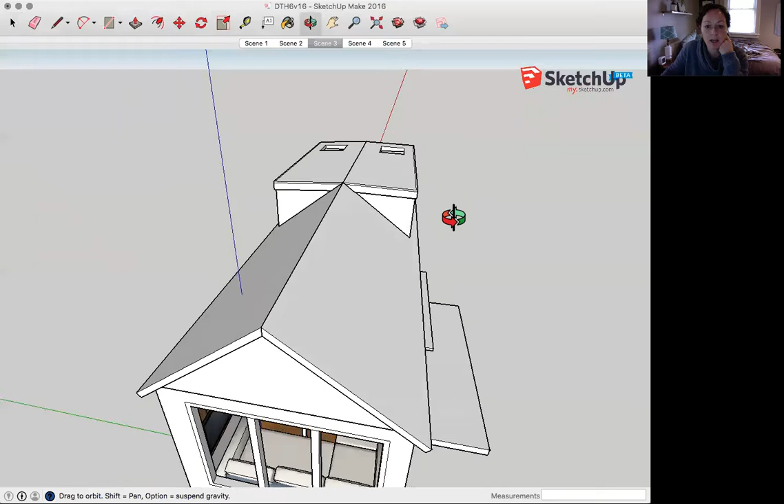Okay, so this is what you've seen a lot in tiny homes. This is a gable roof with a dormer on each side. A dormer is basically a slightly less inclined roof that pops out - the framing for the roof continues all the way around it, and then a triangle comes out. That's a traditional dormer. From the inside it'll look a little different than this finish, because there won't be this angle here. But I just wanted to quickly go over this with you.

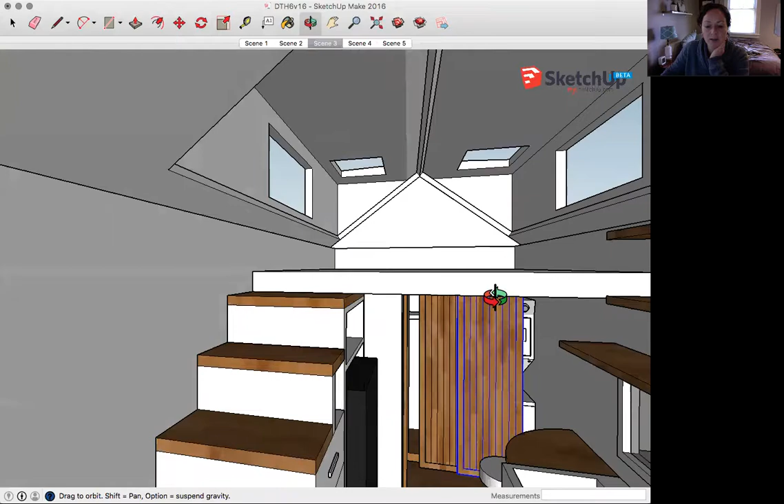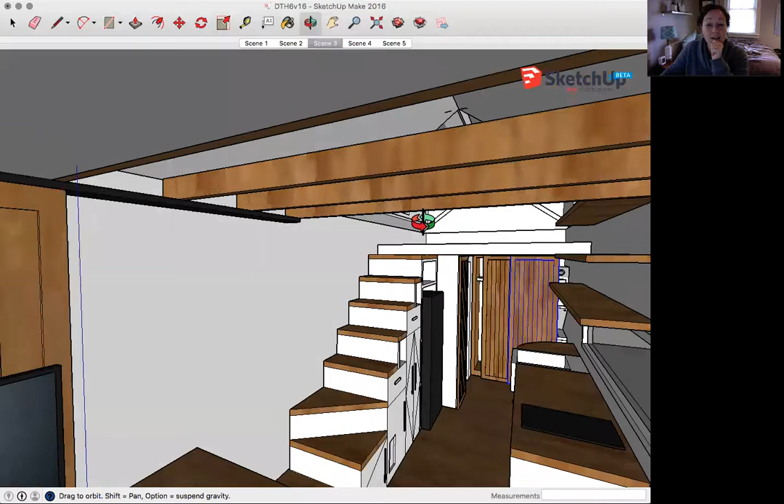So this is pretty much how you get your rectangular space up here with two dormers, but that really limits the amount of space you have in the living area. I know you wanted bike storage, and there wouldn't be enough room unless you put your bike above these beams - I think it would actually fit there. I wanted to show you how much these beams are going to cut off the space, to make sure you're okay with that, because it's really going to divide the top and bottom areas a lot. So this is with the dormer.

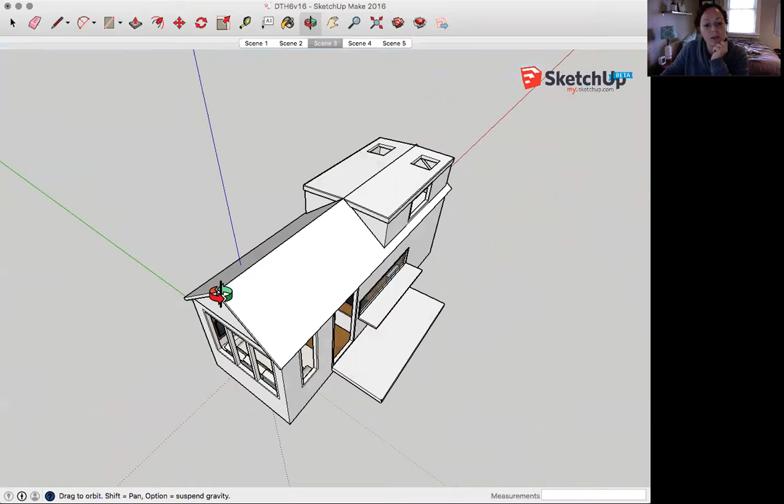The other option we were looking at before is a single shed roof, and that's this. With a single shed roof there's a ridge line - I didn't explain the ridge line either. On the ridge line, there's a single ridge beam coming from the front of the house to the back. That's a single beam that is a continuous load path essentially for the roof, and it falls on each one of the rafters.

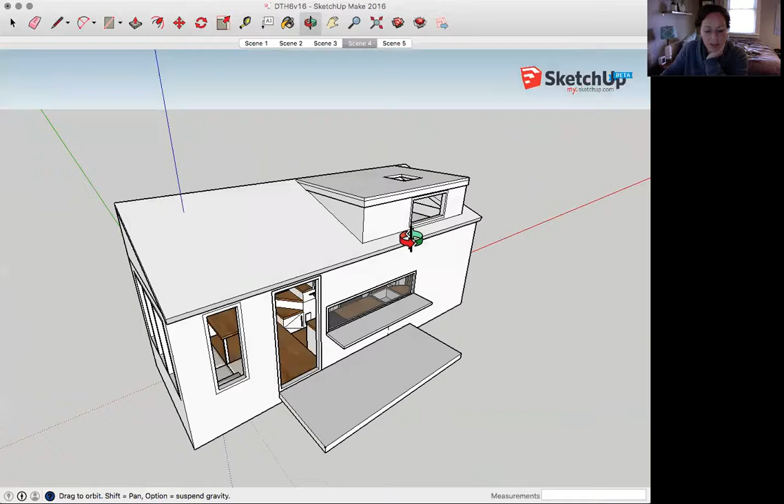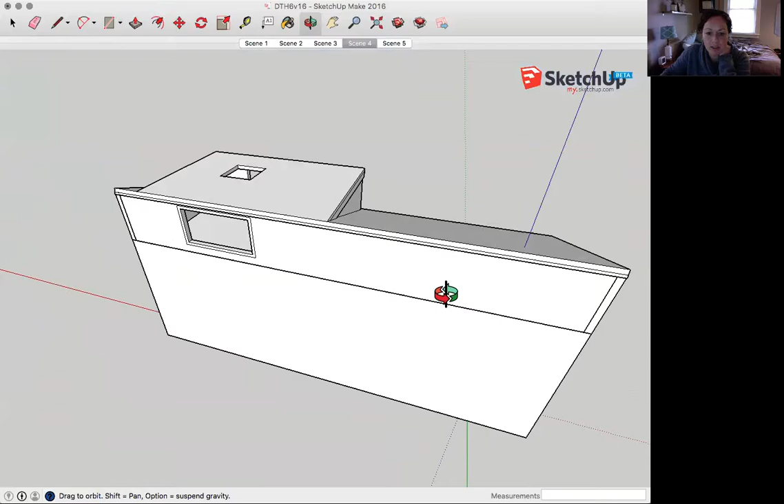On a shed roof, the ridge beam is clearly and obviously at the top, and you can pull a single dormer out to the side. That only gives you one skylight, but you could probably get two small ones in there, or one larger one. This one's only 2 foot by 2 foot that I'm showing, and a 2 foot by 4 foot window, but you can probably increase the size of that. On this side, you could put windows all across the top area and get a lot of light on the inside.

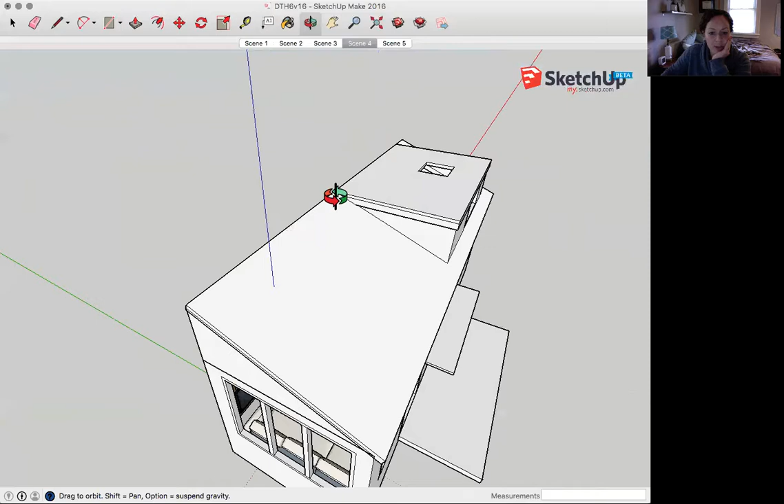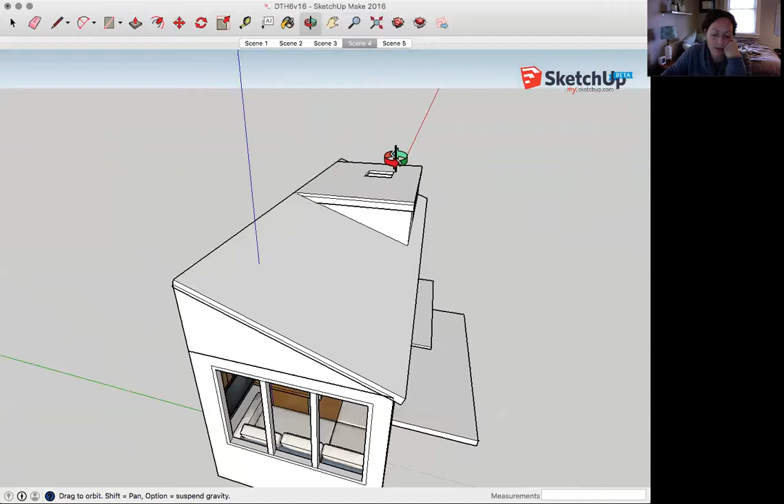The reason you couldn't have two dormers off of a shed roof is that you have this ridge beam. If you put another dormer, you'd have to have the peak at the center, and then it actually wouldn't be a dormer at all - it would just be a gable roof at this side. Typically you can't do that, because if you put a gable in the center, you'll have this weird area where the two roofs cross. Let's see if I can show you - you'd have like a triangle where they meet. You can't do that because of the way flashing works. Well, you probably can, but it's not advisable, and you'd have a gap on the back side. So I didn't even model it because it's just not something you can do. I hope that makes sense.

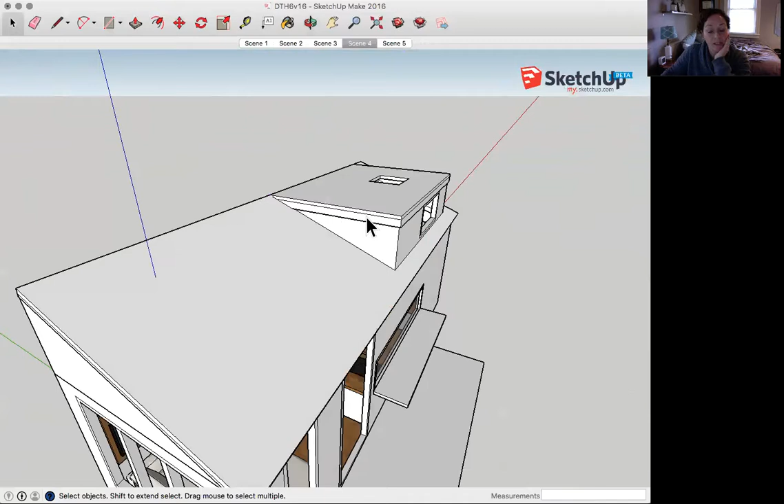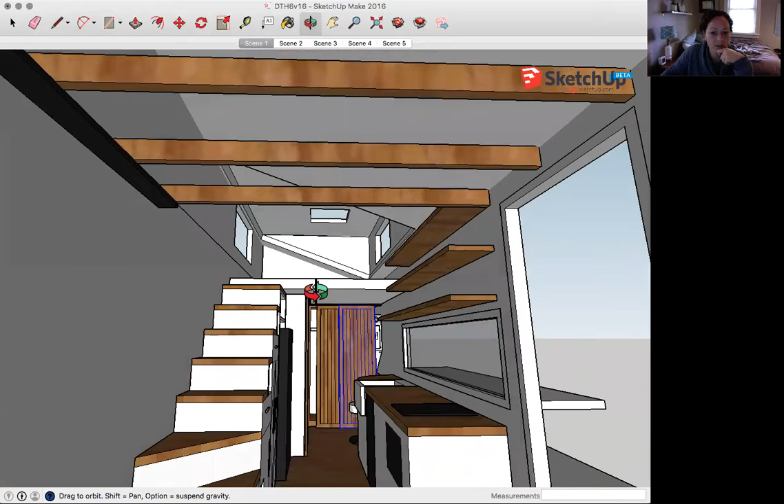Let me know if it doesn't work, and I can talk about it. There's more roof options than just these. The thing about this one, when you're on the inside, is it gives you a lot more space. You still get the same shape area, actually. We can pull this back to the wall even, and you get the same space.

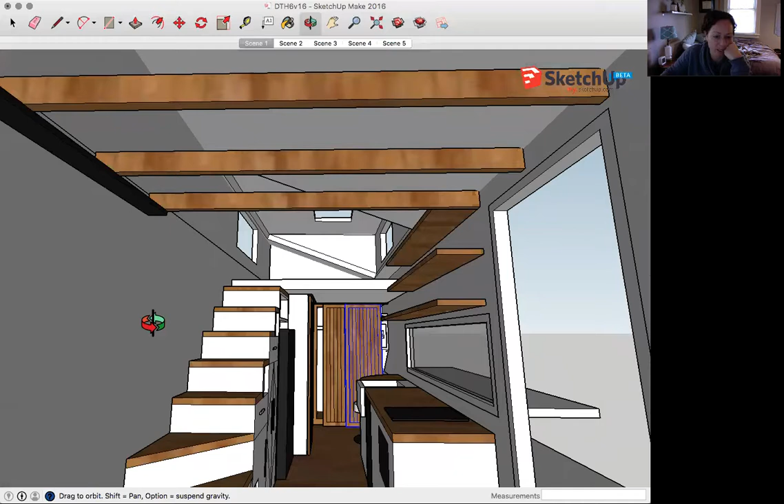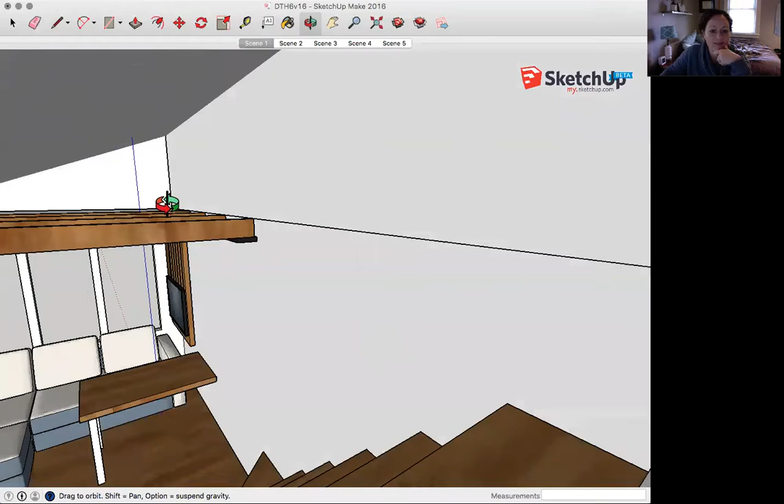Let's compare them. This is the shed roof. You get kind of single height on this side, where you could pull a bike up against the wall. I'm not sure how that works with these beams, though. Maybe you could stand on the stair here, because you have to have this far enough back that you can actually walk up the stairs. But maybe you could just stand on the stair and huck your bike up there. That's not ideal.

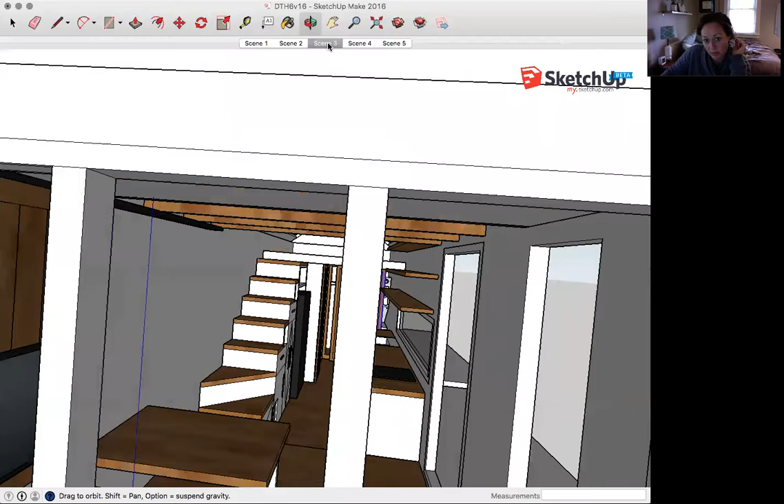So let me know what you think about these beams. I'm not convinced they're a great idea, but if you like the look of them, they might be worth the disadvantages. This is with a single shed and a single dormer off the shed roof, and that still allows a lot of space on the roof for solar panels, a single plane for all the solar panels. That'll allow the structure to be a little more beefy in that area to hold those panels too.

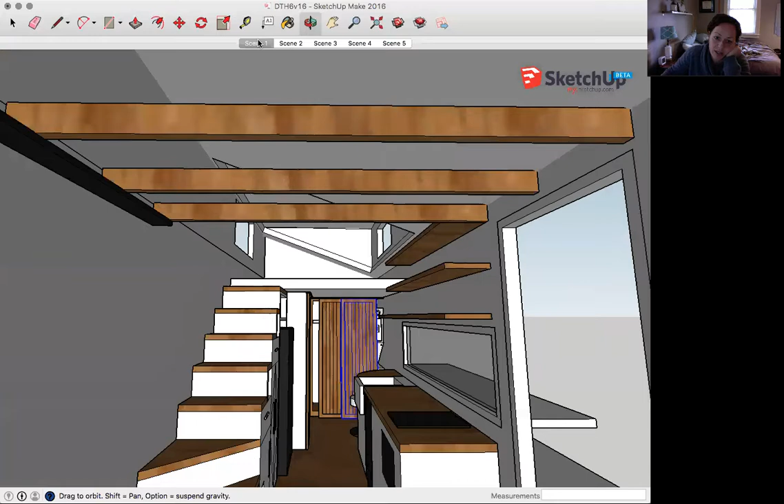But you'll see if you compare this with this, you're still getting a good amount of headroom, really the same amount of headroom. And you're getting windows on both sides, the same as with that. The only difference is that typically you only see these with one skylight, but if we got pricing for a larger skylight, it would virtually be the same. Or we could add two smaller ones up there.

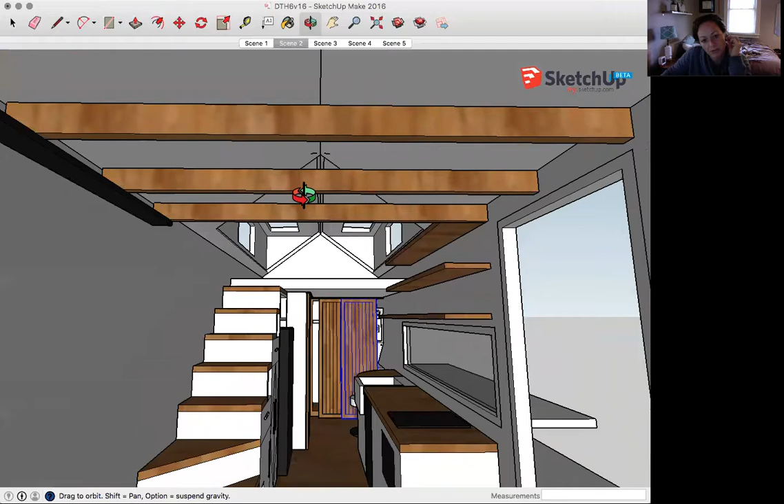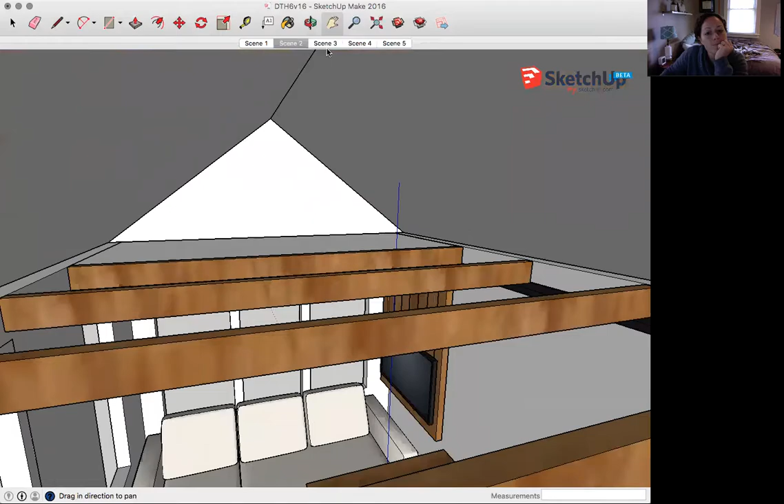It's up to you, but I wanted you to see the difference. I think this limits your roof area in the storage section. The gable roof will limit the storage you have on this side versus the other version. Sorry, is that confusing? Versus you get a little bit more space and less over here. So, you know, it's up to you.

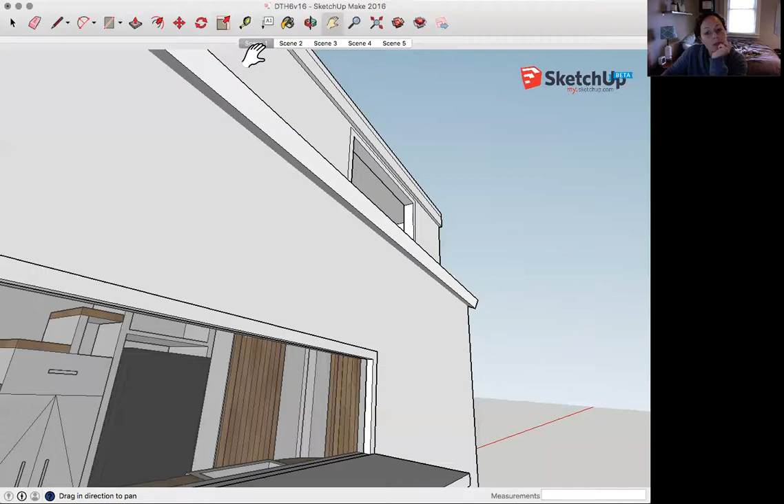There might be some other options if you want me to explore other roof lines. Let me know, it does take time to try and figure these out. Let me know what you think of these beams up here too.

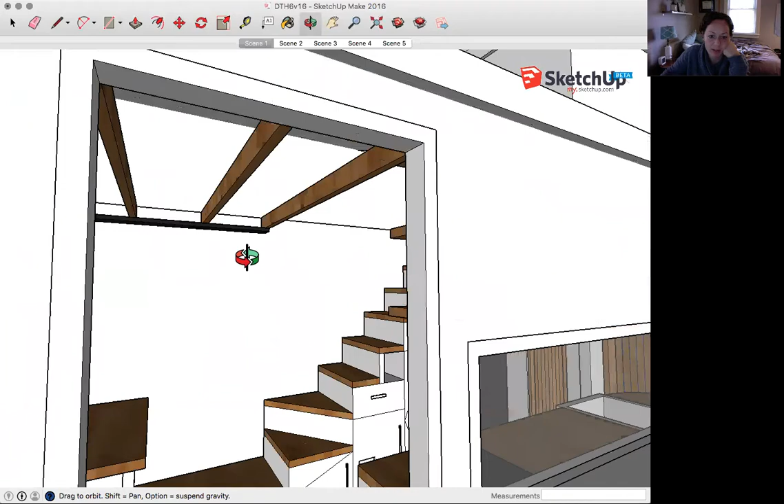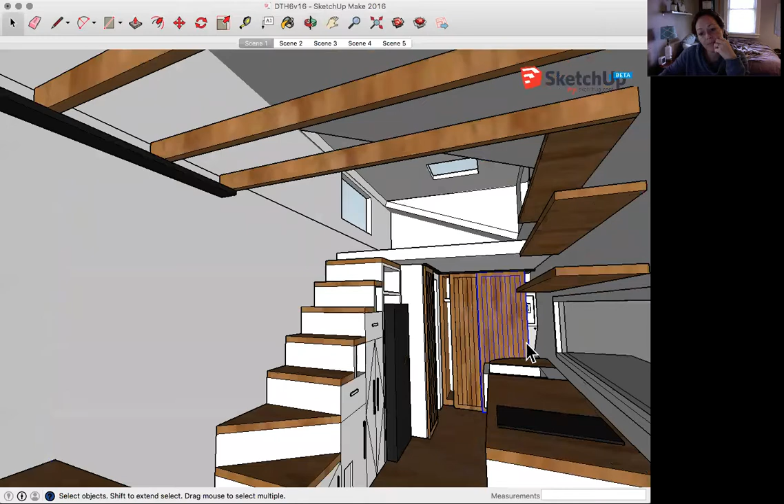Oh yeah, and if you want to add two doors, we can totally do that. I didn't even realize I didn't have two doors, but it makes more sense to have a closet door and a laundry door, unless you want to be able to take your laundry out and put it in the closet at the same time, then you wouldn't be able to do that in either case. So it kind of makes sense to have a closet door and a door to cover up the laundry washer and dryer. I honestly think that's probably smarter.

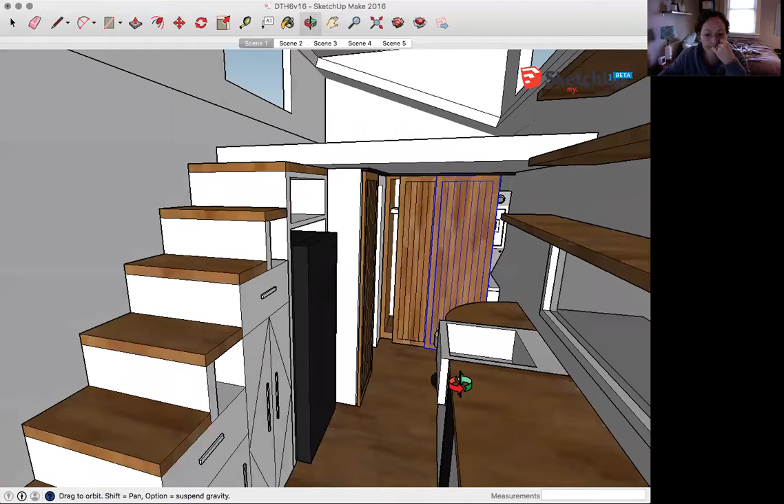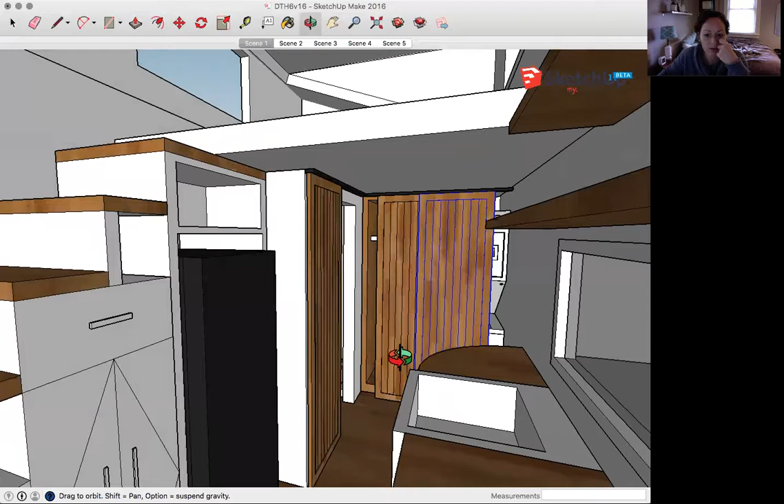We also didn't talk about the privacy factor with this layout. I was wondering what you think of that, if that's an issue, or if you want to put up blinds or something. We might be able to make some kind of divider come up and over here, whether it's a curtain or something, a screen of some sort. So yeah, let me know.

Alrighty. I haven't worked on anything else much this week. Oh, work is a little crazy. So yeah, I'll try and work on it more next week.

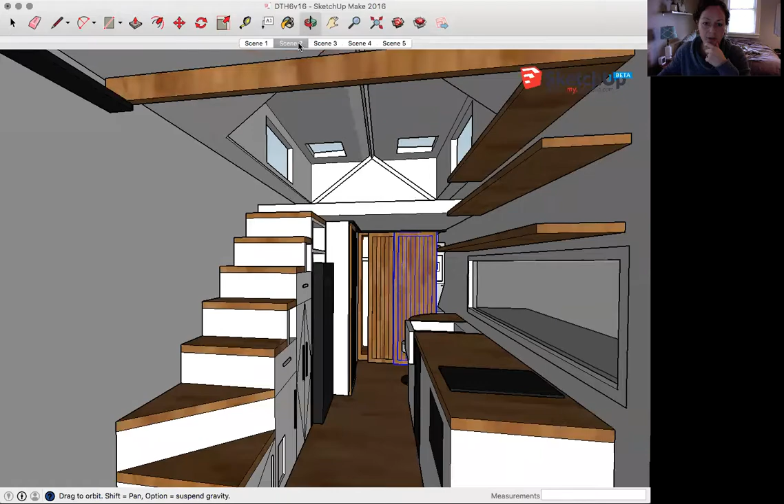Anyway, the trailer question too is a good question about the length from the wheel well to the back of the trailer. I went to a dealer today and talked to a guy about a tiny house trailer, and he said he sold four of them because the high school in my town is building tiny houses, but they use 16-foot trailers. Let me get the book for you real quick.

Sorry, okay, so this is what he gave me, and this is what I took. Is it backwards for you?

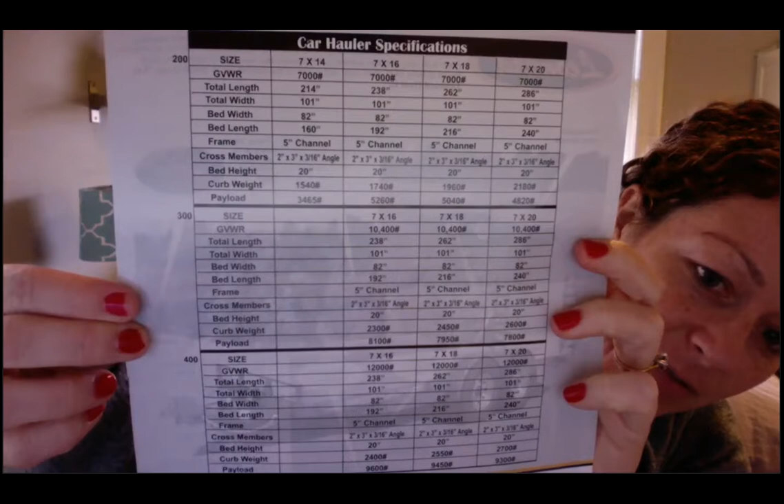Anyway, so basically for this brand, the 300 7x20 is the standard with 10,000 pound axles. Again, it gives you the total length, total width, bed length, 5-inch channels, bed height, curb width, curb weight. But it doesn't give you that dimension from the wheels to the back of the trailer.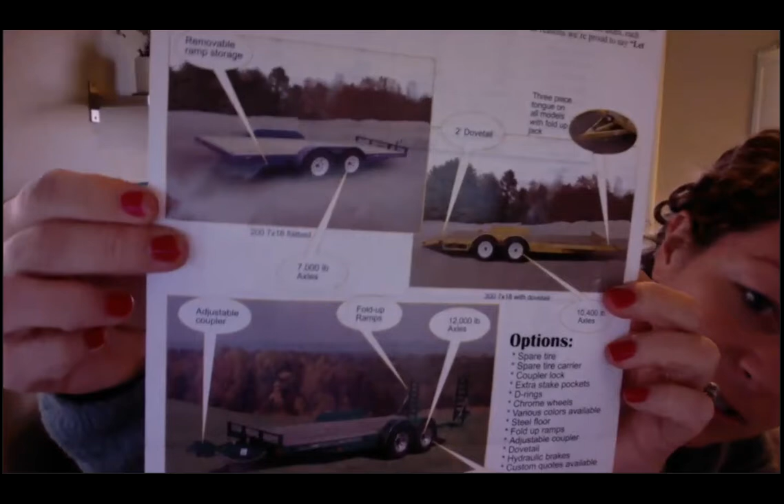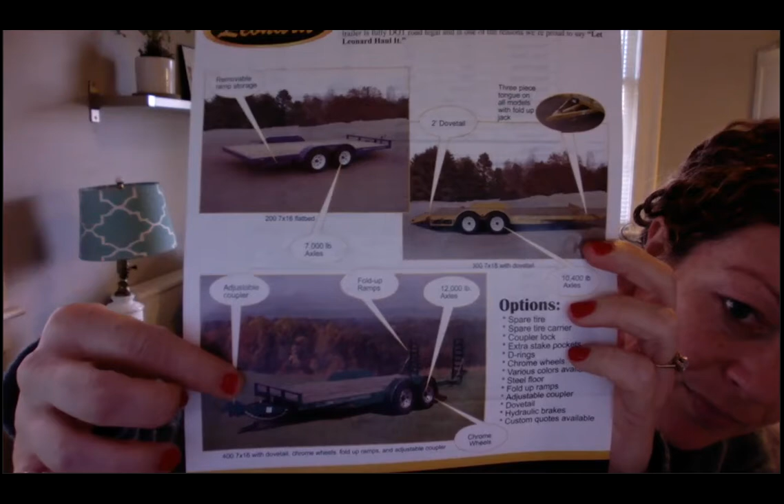And it really seems to vary a lot. Even if you look at these three images, the length from the back of this trailer to that wheel well is significantly different than this one to the back of that. This is the longer trailer, but this is an even longer trailer and it's less distance.

So until you actually buy a trailer or go look at the trailers you want, it's hard to know exactly what we're going to get, because the dealer also said it varies by brand too, because of the different weights of the structures they use.

But I've been kind of guesstimating on photos that it's a quarter distance from the center of the axle to the end of the trailer, which is 6 feet, and then it ends up being another foot to the end of the tire. So 5 feet to the back, but that might be a generous estimate.

That's kind of the benefit of having the entry over the wheel well in a way, is that you don't have to worry about that exact measurement. But we can adjust the drawings. Of course, that's what I'm concerned about, making sure the structure is going to be accurate for when you go and build it. But if you're just interested in the sizing, then that's kind of my best estimate.